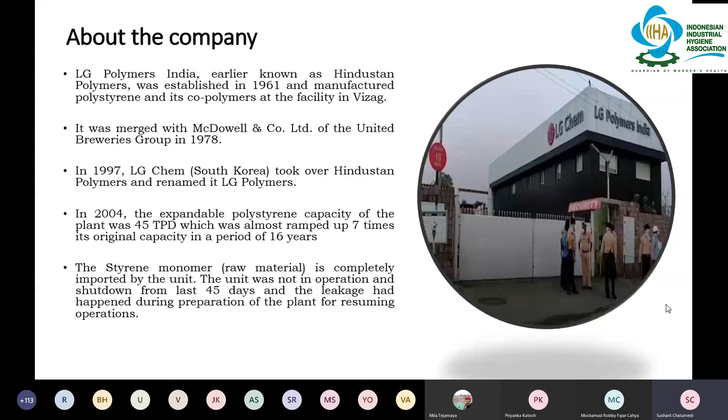Due to the current COVID pandemic, a lot of plants were facing manpower availability constraints, and also government had asked them to cut short operations. LG Chemicals was one amongst such plants, and they had shut down their operations on 24th March. And after almost 45 days, on 3rd or 4th May, they got a clearance from government to restart or sort of prepare for restarting their operations.

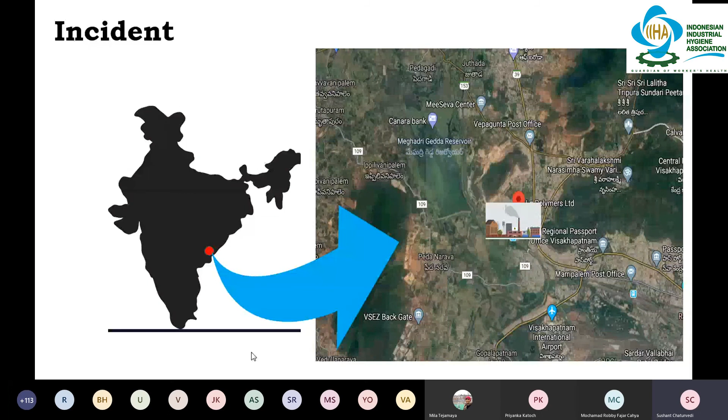Just to give you a brief idea about the neighborhood around the plant. On the north side of the plant, there was a vacant land. On the south side, there is a railway track. On the west side of the boundary, where most of the impact and damage has been recorded, there were residential plots. And on the east side of the plant, there is a river at 2-kilometer distance. This entire plant is spread over an area of some 213 acres, and it has got multiple tanks with huge storage capacities for styrene monomer.

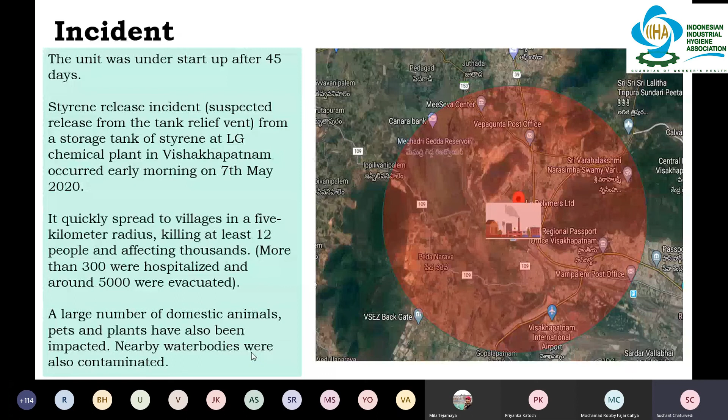So this is to give you an idea: the 5-kilometer impact area, which was identified by the municipal corporation and later on by the government agencies, was predominantly the impact footprint. This graph shown to you is a graph generated in a dispersion modeling software called PHAST version 8.2.

As a process safety engineer, I was quite intrigued about what could have gone wrong and what was the actual impact, because styrene is basically not a very toxic or hazardous chemical from a toxicity point of view. Yes, flammability hazards are there, but still there were some 12 fatalities. So I was really concerned about whether such fatalities should have happened or whether they could have been avoided.

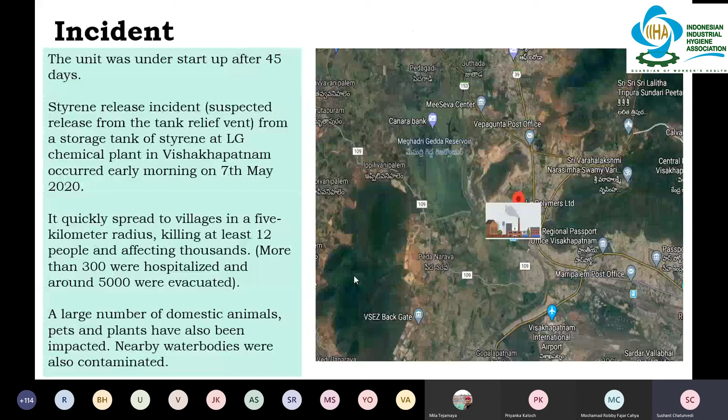Following is the sequence of events on the fateful day. In the early hours of May 7, 2020, at about 3 a.m., the storage tank developed a leak of styrene vapors from the top of the tank, which started spreading beyond the factory boundary towards the west side. Like I mentioned earlier, the wind was around 1.1 meters per second, going from east to west, so the west side saw the spread of styrene vapors.

The incident is tragic, of course, no doubt about that. But had the tank temperature shot up beyond 154, the incident would have been much worse, because that's the boiling point of styrene. As per the interim report published by the government agencies, some 800 tons of styrene escaped in the incident. At the time of the incident, they had an inventory of around 1800 something.

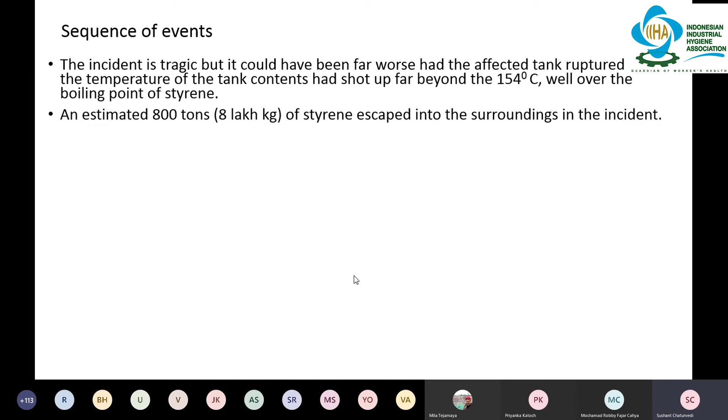The following are the noteworthy points. So what contributed to the incident aggravating to such an extent is, it surfaced in the interim report that the working crew was not able to access the PPEs, especially the respiratory protective device of SCBA, in a timely manner. The emergency response preparedness of the site was not up to the mark.

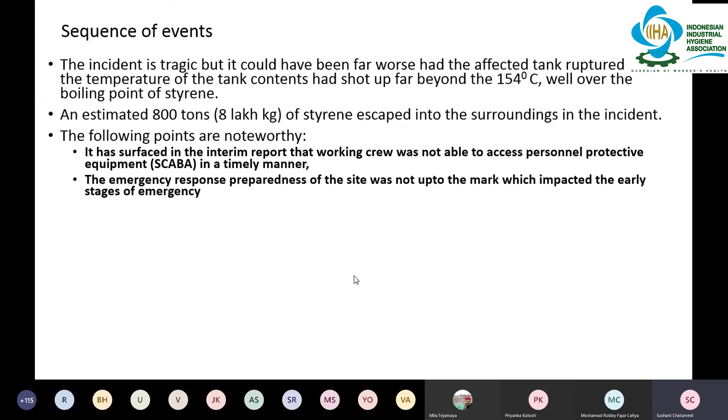This is very important. So already they were operating with a very skeletal operating crew, and even the crew which was present was not having the right mindset or the preparedness of emergency handling. So in the early stages of emergency, they could have controlled it, but they went into a state of panic, and because of a lot of reasons, they were not able to manage the emergency in a proper way.

And it was also identified that the public siren system available in the plant could not be activated, since it was a manual siren. It required someone to go and press the button to start the siren. And that area had been rendered inaccessible because it was engulfed in the vapor cloud of styrene. So this in turn hampered the alerting people process, and thus the extent of impact increased.

The root cause analysis, as per the report, shows that the problems probably began in April 2020. So, like I said, they had shut off their operations and they were still handling and storing the inventory of styrene since then. I'll cover this point in subsequent slides, but there are certain things to be ensured when you are handling and storing styrene, which probably they overlooked, and this incident started probably in April 2020.

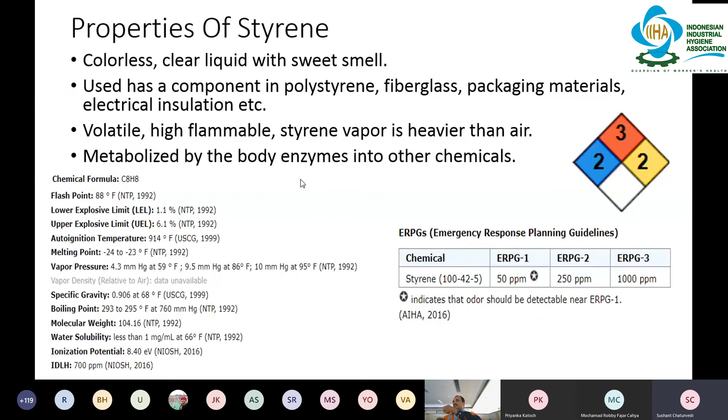To give you a brief idea about the properties of styrene, it's a colorless liquid with a sweet smell. It is used extensively for production of polymers. The main ERPG values are 50 ppm and 1000 ppm. It is a flammable chemical. And the biggest problem with styrene is it has...

Sushant. Sorry, Sushant, I guess there's some request. Just be a bit slower. Oh, okay. Thanks. In the back of my mind, I was thinking there's a paucity of time. No, take your time, just so that people can understand and see your slides properly. Yeah, sorry, thanks. I'll keep that in mind.

So styrene has a typical characteristic of polymerizing, and it also has a characteristic of polymerizing with its own monomer. Styrene basically has a free radical mechanism. So imagine a surface full of styrene, with a lot of monomers of styrene inside it, and it is always emitting styrene. The free radical comes out, and it is in a very excited state. So it requires to bond with someone to reduce its excitement. If it finds another styrene monomer, it combines with it and still stays in an excited state.

However, if there is some inhibitor chemical present like tertiary butyl catechol, it will combine with TBC and then the chain reaction stops. So styrene is a reactive monomer, and the polymerization generally takes place by a free radical reaction, which is initiated either thermally or catalytically. This is most important. For the styrene reaction to start, some energy is required, either thermal or catalytic energy, what we call the activation energy.

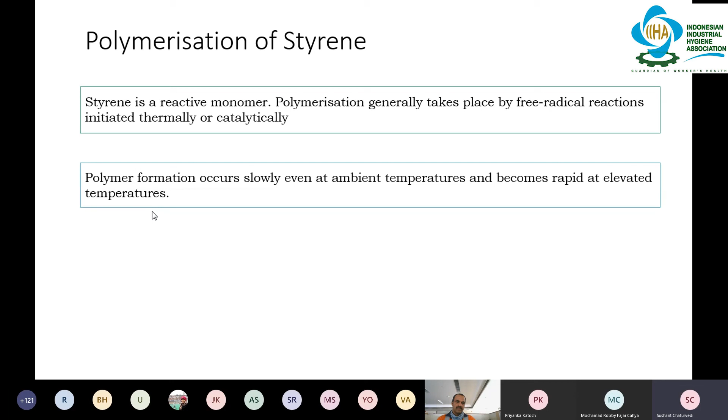The polymer formation is initially very slow when the temperatures are low. So at ambient temperatures, the reaction will not be very fast and the temperatures will not shoot up rapidly. But as the reaction proceeds with the evolution of heat, the temperatures start shooting up exponentially. To avoid this, the globally accepted practice is that the polymerization reaction is retarded or inhibited by phenolic inhibitors, and the most commonly used inhibitor is tertiary butyl catechol. The polymerization reaction is exothermic, as mentioned earlier, and it can become violent beyond a certain temperature.

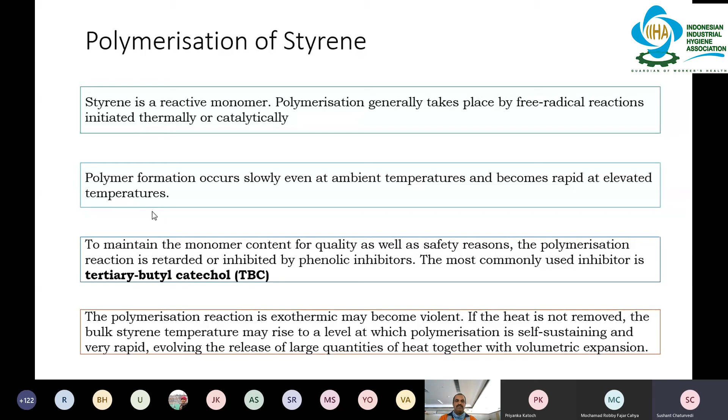If the heat is not removed in a timely way, the heat accumulation can go to an extent where polymerization can be self-sustaining. So it may not require any further temperature excursion, and it can become self-sustaining, and it may not require any other driving force for it to continue. And in the process, it may also release a large quantity of heat together with volumetric expansion, which was what was evident in this incident.

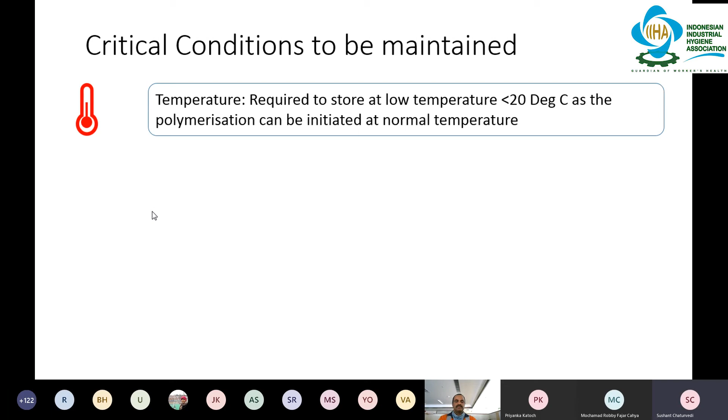So what are the critical conditions to make sure that this doesn't happen? So there are basically three important criteria. First critical condition is temperature. So styrene monomer storage tank should always be maintained at a temperature below 20 degrees centigrade, since that is the onset temperature, and once temperatures are not maintained below 20 degrees, the reactions can start.

TBC dosing. So tertiary butyl catechol, the inhibitor that is being used for styrene reaction inhibition, its level has to be maintained at around 10 to 15 ppm, and this is most important. So TBC level in the tank should be maintained 10 to 15 ppm, and it has to be monitored regularly, because if you start losing the TBC concentration, or if due to some reason the TBC concentrations are depleting, there are chances that the polymerization reaction can start.

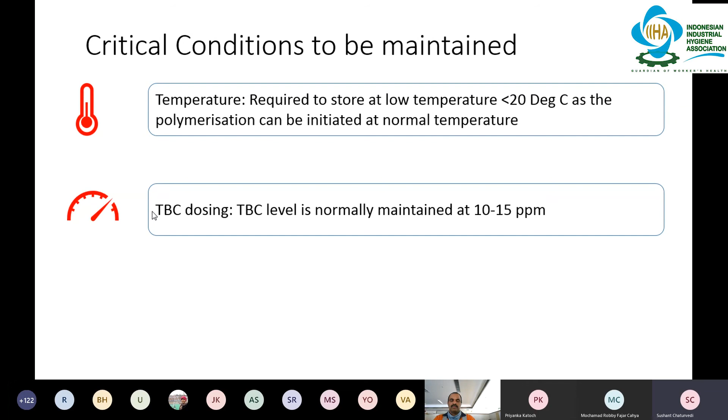And most important, another part is TBC cannot combine with styrene if there is no oxygen. So a typical characteristic of a flammable compound tank like styrene is it will have nitrogen padding. So if there is a nitrogen padding, the problem is that the TBC will not be able to combine with styrene monomer, since it requires oxygen as well for combining with styrene.

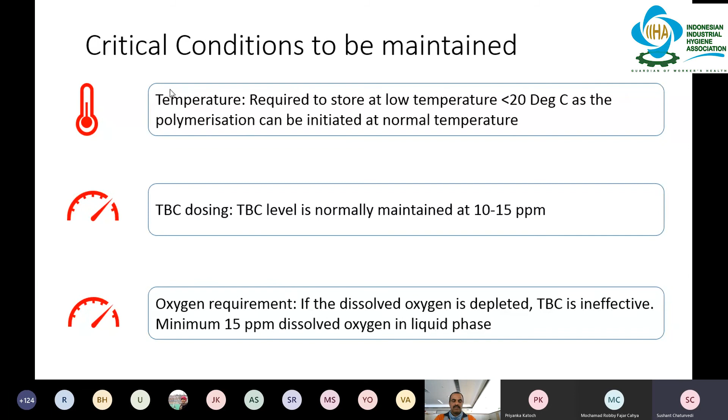So what industry people do is they also maintain an oxygen, or they sort of inject oxygen in the environment of styrene, where the oxygen concentration should be minimum 15 ppm of dissolved oxygen in liquid phase. And this is the precursor for TBC to be effective and available for inhibiting the styrene polymerization reaction.

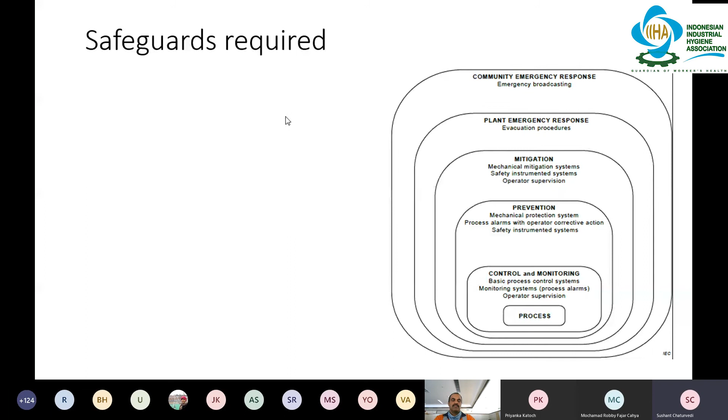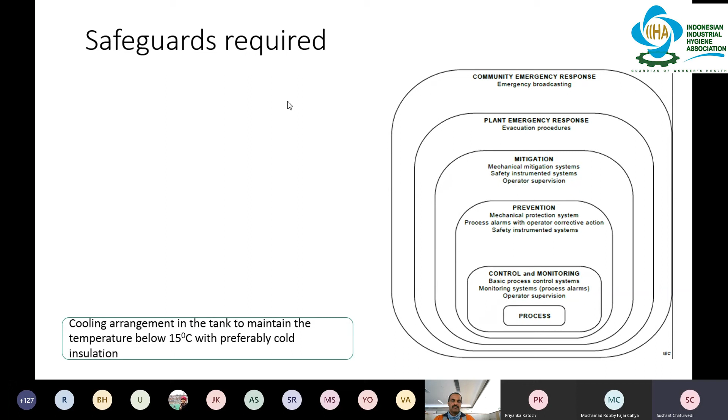So this is the general chronology of safeguards. You first have control and monitoring system, then preventive safeguards, mitigation safeguards. Finally, you have your emergency response systems for plant and for outside. So for control systems, in this case, the tank should have a chilling mechanism or a refrigeration mechanism where temperatures are maintained below 15 degrees, and also it should have an insulation for cold systems.

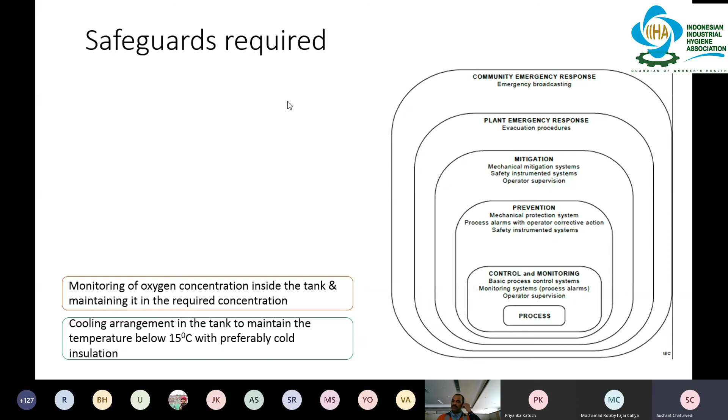The oxygen concentration inside the tank should be monitored and maintained in the required concentration, which, as I mentioned earlier, should be minimum 15 ppm for the styrene to combine with TBC. The TBC level should also be monitored because TBC along with oxygen should be available in minimum 15 ppm concentration. So TBC monitoring is also critical.

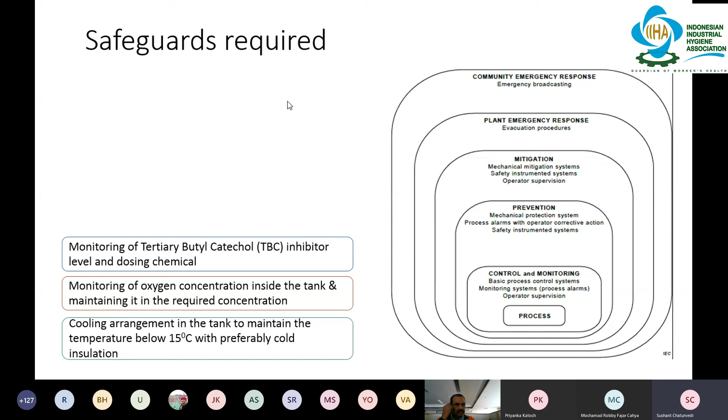In case you are not able to monitor or maintain these concentrations, the first signal should be the temperature rise, and that should be wired to the panel operator. So there should be monitoring of tank temperature at 3 locations: the top of the tank, middle of the tank, and bottom of the tank. And once you have a temperature rise of the bulk mass of styrene inside the tank, there should be a mechanism which alerts the operator that tank temperatures are rising.

There should be another pressure alarm. At times, instruments can go haywire. So in case your temperature alarm doesn't show the excursion, you should also have a pressure alarm to alert the operator. The emergency relief devices should be there. Here in this case, there were rupture discs, there were relief valves. So all tanks should have some emergency relief devices to take care of the overpressure.

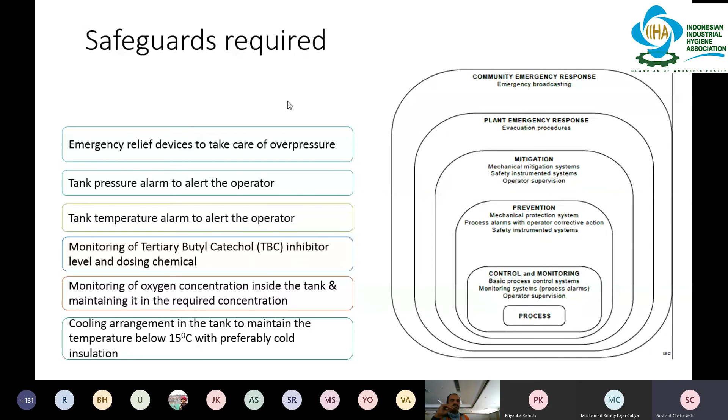And this is very important because in case of reactive chemicals, the relief devices have to be sized using specific studies. So there is a study called vent sizing package, which is used for understanding what should be the relief device size. Those are very specialized studies which need to be done when you are engineering the emergency relief devices for chemicals like styrene. And finally, you need to have very sturdy and up-to-date emergency response plans, because everything can go wrong, and finally you have to have yourself prepared for the emergency.

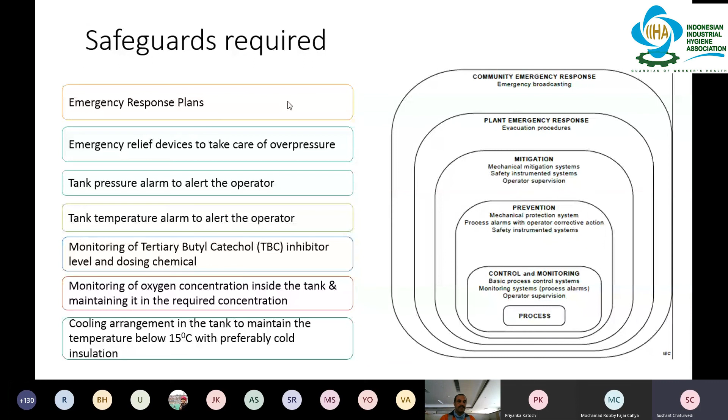There was an interview which was telecast on a local channel in Andhra Pradesh. Basically, this plant is located in Andhra, and Mr. Mohan Rao, who is the director of operations and currently under legal investigation, was interviewed by local TV channels, and it was in the local language. So I got it translated with the help of my friend.

What he mentioned prima facie was, according to him, the reason for the styrene leak was a runaway reaction, and this caused overpressure in the tank, blowing the roof. However, later on it was understood that the roof had not blown off. Yes, there has been some leak in the tank roof, but there was no blowing off of the roof and eventual release of the gas. So from the above statement, it can be inferred that the temperature shot up beyond their control range, and they were not able to stop the leak as the polymer had a runaway reaction, and it cannot be controlled.

In fact, the interim report clearly states that they had a practice of switching off the refrigeration system every night, because they believed the ambient temperatures were low enough to keep the styrene monomer below the required temperature of 15 degrees. And also they had depleted stocks of TBC. So what they thought was, because they already had a certain amount of TBC in the tank, maybe they won't be requiring TBC for a long period of time. And also it is believed that they might not have monitored the levels properly.

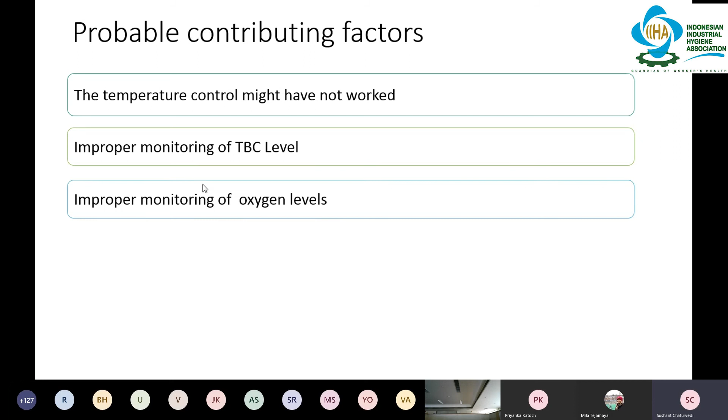So what are the probable contributing factors? These are based on the reports. The temperature control might not have worked. Improper monitoring of TBC levels. These are basically my inferences from what I read on the internet. So maybe they were not maintaining the temperature control properly, which has come out in the report. Maybe they were not monitoring the TBC level. Since they didn't have TBC quantities, the monitoring became very critical for the existing concentration. So maybe they were not monitoring properly. Also, the oxygen levels were not being watched properly.

Since they had shut off the plant for almost 45 days and they had very less staff to operate with, they should have conducted an effective pre-startup safety review so that it could have helped them in making sure and checking whether they have the right systems and right people to kickstart the plant back again.

And in general, it was observed that the people who were there probably did not have the required level of awareness about the hazards of styrene. What are the reactivity mechanisms? What are the runaway characteristics? And how to handle the emergency and be prepared for the emergency. So in total, it could be said that the awareness about the hazards of styrene was not at the required level.

And finally, as is evident from the report and from the extent of damage, the emergency response was not effective. So emergency response and control planning should be proactive, and you should be prepared with all the equipment and devices beforehand. And you should not run here and there in case of emergency. You should know exactly what needs to be done by whom and up to what extent.

So with that, I would like to hand over to Mr. Shrenik for his presentation. So Shrenik, over to you. Thank you very much, Sushant. If you can unshare your screen. Yeah, I've stopped sharing. Thank you very much. Excellent session, Sushant. Really appreciate the way you talked about some of the background about the company, what led to the incident, and then what were some of the things that were missing. So really very nice information was shared by you. Really appreciate it. If you can mute your line, it will help me. Okay.

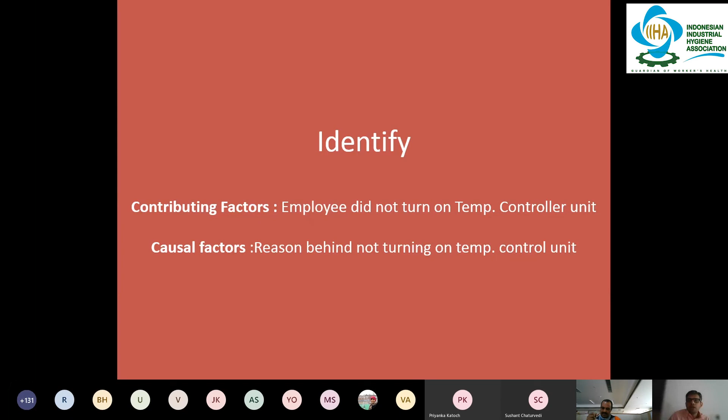So what we have done is we have used the 5 why analysis and cause and effect analysis. We kept asking questions based on the information that is available, and then a team of IIHA sat together to identify what were some of the root causes that we could identify related to the causal factor analysis. So the main incident was a gas release.

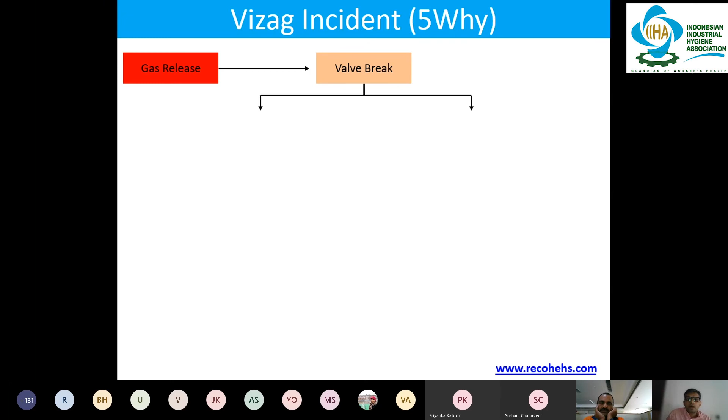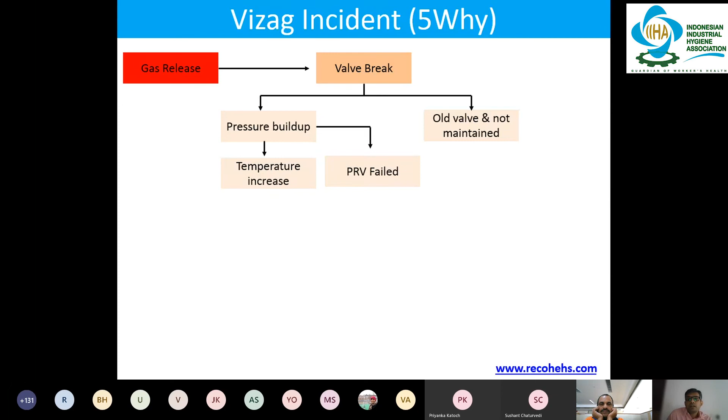Now, we tried to identify why that particular gas release happened. So one of the things that the IIHA team came up with was there might be a probability that the valve broke. Now, based on the valve breaking mechanism, we tried to identify how the valve would break. So there can be a pressure buildup, or the particular valve was very old and not maintained. Now, why was there a pressure buildup? Because there was a temperature increase, or the pressure relief valve failed.

So we tried to go deeper and identify further why there was a temperature increase. There was a temperature increase because the temperature controller failed, because the employee did not turn on the temperature control unit, because we failed to turn on the temperature unit during the startup. So these were a few of the things which would have led to a temperature increase. And also the chemical reaction inside, as Sushant shared, would also have contributed to the temperature increase and then the pressure buildup. Now, we tried to find out why the temperature control unit failed.

So we dug up some information: the temperature log we checked was okay. The particular temperature controller was calibrated, so lab tests and the calibration records were available. This says that these are not the reasons which resulted in the temperature control failure. Then we moved to the next cause, whether the temperature control unit was turned off.

We found out that procedures for operating this particular storage tank were not available. So the procedure doesn't specify that the temperature unit needs to be turned on when we store any particular chemical. Now, the employee who was using this particular storage tank was not aware that he needed to turn on the temperature unit controller, and there was no pre-startup process safety management done for this particular activity.

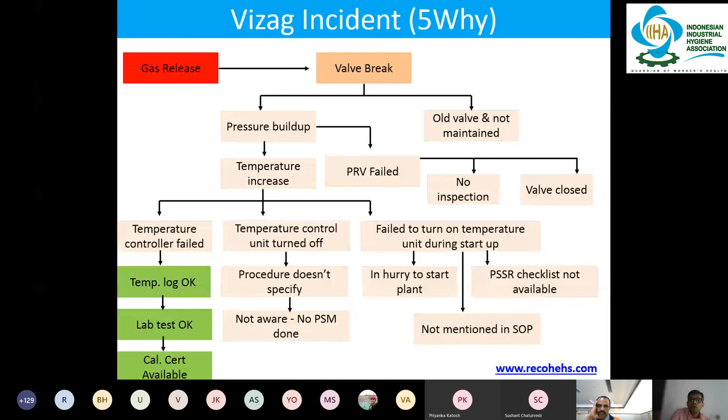And then when the pressure relief valve failed, probably there were no inspections, or that pressure relief valve would have been closed. And that is why that pressure buildup happened. And then because of it, the valve broke. So that was about the 5 why analysis that we used.

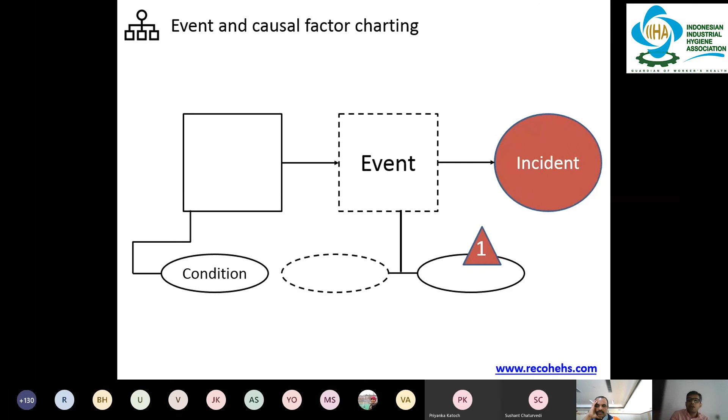Sushant showed us all the incidents before the gas release, but now we have used this causal factor analysis to identify how the response was once the gas release happened, and what are some of the things or conditions that were missing in that response. So we have covered both. First is before the incident, what are the causes and things that happened, by 5 Why analysis. And now with this causal factor analysis, we are going to demonstrate what are some of the conditions that were not met after the gas release happened.

So 11 people died and around thousands of people were affected. Now at 4 a.m. they notified the authority, and around the same time evacuation started. So when they started the evacuation, there were some conditions that had to be met, which means those control measures had to be there at that time to ensure that evacuation is proper, and then the casualties will not increase. So emergency equipment was not available when they started the evacuation, like self-contained breathing apparatus and all. The people around the industry and inside the industries were not aware, if a gas release happens, of the control measures we need to take, or how to keep ourselves safe from those incidents.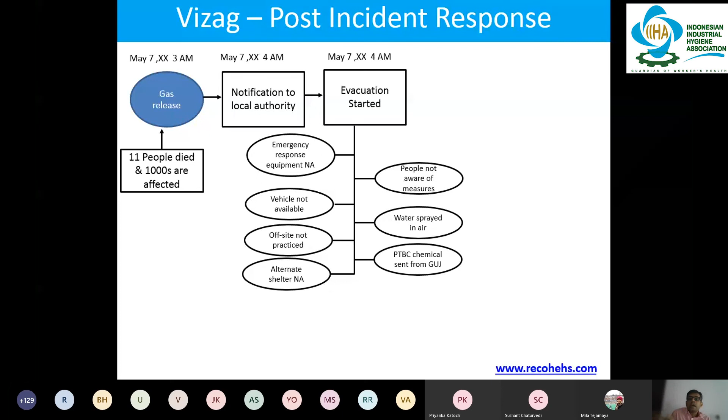Now, emergency vehicles were not available. There was a huge evacuation required and the number of vehicles was very short. So that response time also led to more casualties in nearby premises. Now, they started spraying water in the air, and the offsite plan was not available and it was not practiced properly. Now, the PTBC chemical was sent from another state. So if their emergency response was proper, they should have kept that chemical at the site, so that in case some emergency happens, it could be used to reduce the effect of the styrene gas release. If all these things had been in place, probably this severity and this many casualties would not have happened.

Now, around 5 a.m., they started to admit people to the hospital. Now, what happened at the hospital? The staff was not aware of the treatments or the antidote that needed to be given to the affected people. So that was not in place. There were not enough beds available for the number of casualties. There were a thousand people affected and they did not have that much capacity at the hospital. And they wanted to give them oxygen, but they did not have enough oxygen bottles at that location. And around 11 a.m., they brought the situation under control.

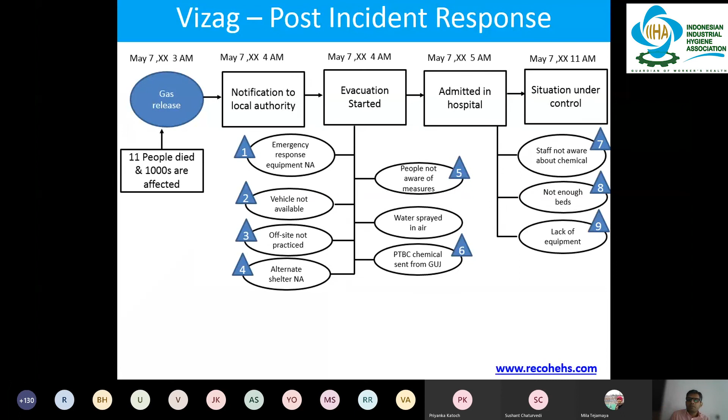So what I mean to say is there were 9 conditions that were not met once the gas release happened. So in recommending controls, we have looked at these 9 conditions post-incident, and all the 5 Why analysis causal factors that we identified. If these had been met, probably the thousands of people affected would have been brought down below 500, and even the casualties. So while identifying the incident control measures, we looked at the work environment and equipment. We looked at the procedure followed by the company, the people interaction during that time, people and procedure interactions, and the environmental interface.

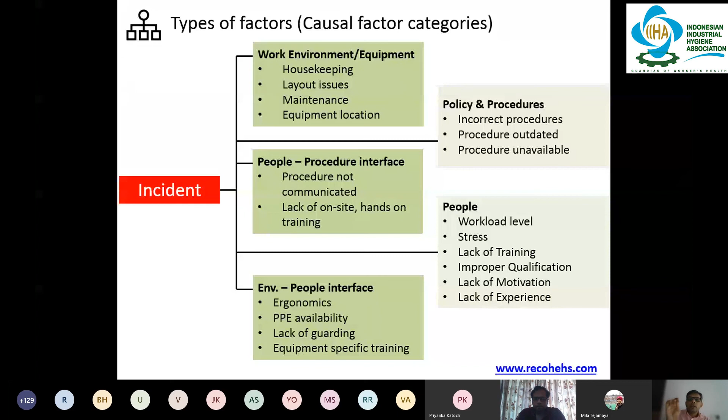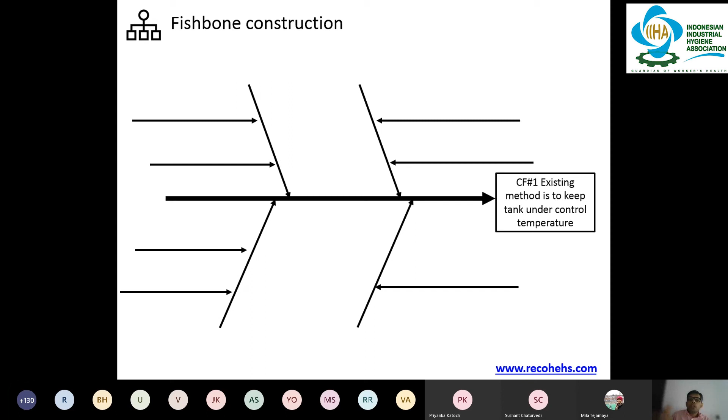So these were the conditions and the factors that we looked at while identifying the particular corrective actions for this Vizag incident. So what we did is for all those 9 causal factors that we found, and also from the 5 Why analysis, we developed a kind of fishbone for each of the causal factors. So we have 9 plus 6, total 15 causal factors. So we developed a fishbone for each of those causal factors and tried to put it in a particular fishbone analysis.

So I'm going to display only one causal factor for your purpose, on how we have identified the particular corrective actions. And then at a later stage, I will summarize a few of the corrective actions. So training to the people who are working with the particular equipment was conducted 5 years before. It was not conducted recently. The training program was not updated using the particular methods that are required for people to know.

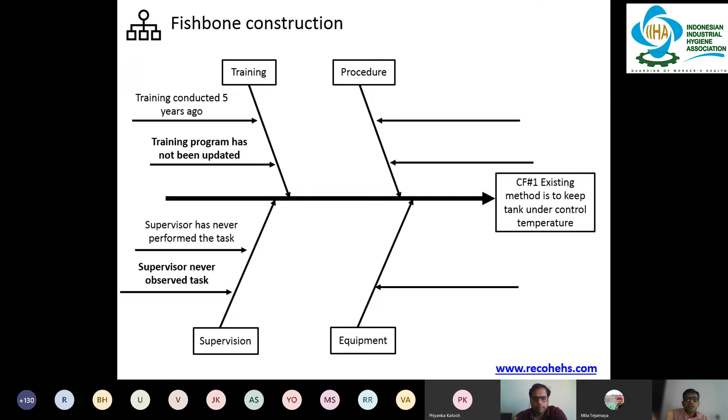If we talk about the supervision, the supervisor never performed this particular task, or he has never seen this particular task. So probably he did not have an idea on how to restart these particular operations and what are some of the storage practices. Now, the procedures, we believe, were unclear for people to follow, and they were not written step by step. If they had been written step by step, probably this would not have happened, and employees working with that would have at least followed those procedures.

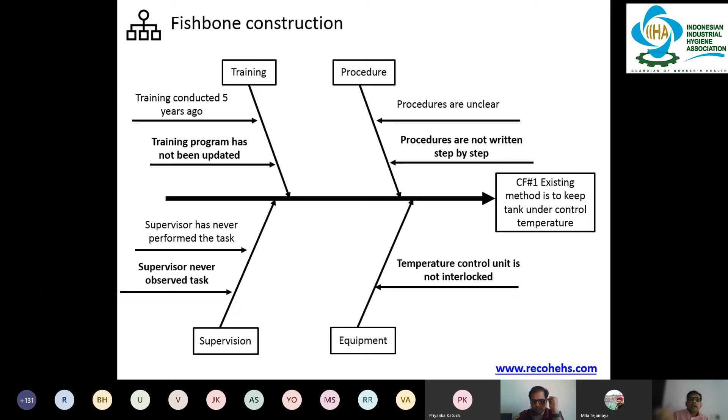And then when we looked at the equipment, the temperature control unit is not interlocked. So if temperature is increased above 20 degrees Celsius, it may have an interlock. So you will not have a storage. You will not have any addition of styrene inside the tank. And also you will have a cooling system getting started. So those kinds of interlocks were not in place when the equipment was there.

And this is my last slide on some of the corrective actions that we believe can help in terms of not repeating such an incident in future. So the temperature control unit was turned off. If there is an auto cutoff temperature controller, then this would not have happened. Communication, the process safety management, temperature rise alarm. If there is a temperature rise, there will be an alarm. Temperature interlock with pressure relief valve. So if temperature goes above 20 degrees Celsius, the particular pressure relief valve will open automatically.

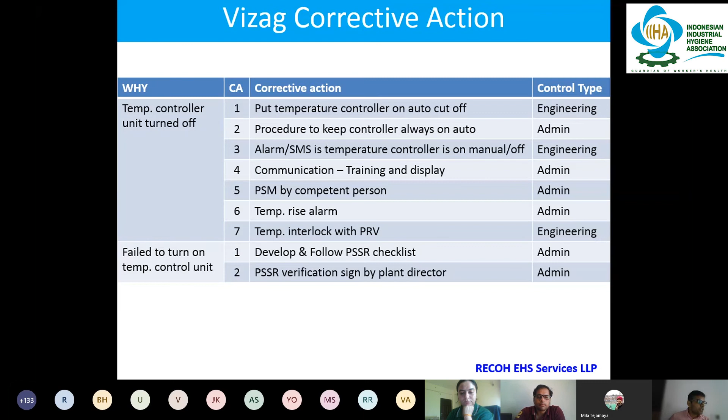Another factor on which we have identified the control measure is failure to turn on the temperature control unit. So develop and conduct a proper pre-startup safety review, and then that verification needs to be done by the plant director at the particular facility. So with this, I will say this is our analysis of the CIHA team using both 5 Why analysis and fishbone to derive the corrective actions. And we tried to cover both pre-incident, what could have led to this particular gas release, and then after the gas release happened, how was the response and where we can improve further to keep the number of casualties at a lower level.

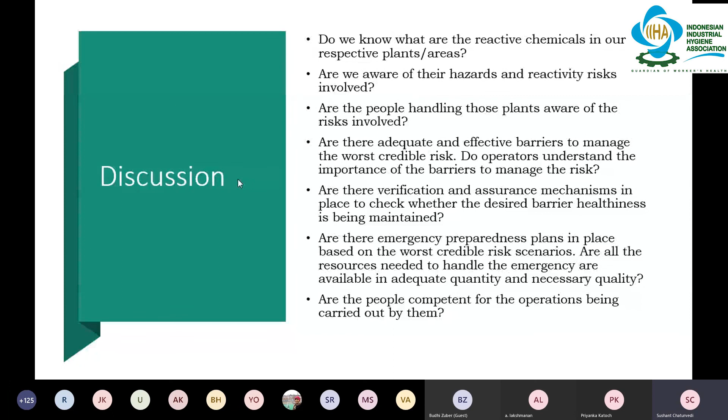And last but not the least, are there emergency procedures or emergency preparedness plans in place based on the worst credible risk scenarios? Are all the resources needed to handle the emergency available in adequate quantity and necessary quality? And are the people who are doing the activities in the plant competent for carrying them out?

Here I would like to bring in some of the technical aspects about reactive chemicals and how they are overlooked or not understood by people at large. A few important terms we should understand or try to find out about when we're handling or dealing with reactive chemicals are self-accelerating decomposition temperature, temperature of no return, the maximum reaction temperature and pressure, incompatibility or compatibility studies, or what we call the chemical interaction matrix, and induction time. So I'll quickly go through them one by one and try to explain what they mean and what is the intent of knowing them.

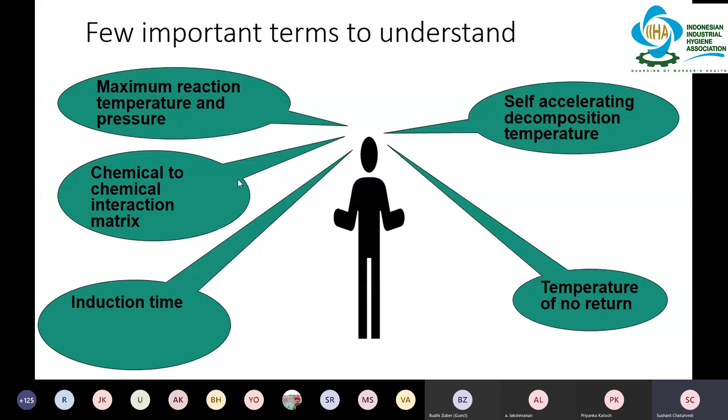So first is self-accelerating decomposition temperature. It is the lowest ambient temperature at which runaway decomposition is observed within 7 days. There is a specific test which is carried out wherein a material is stored in a container and the temperature rise is observed over a period. The information which is gathered helps in identifying the temperatures and the conditions to be maintained when you're transporting a chemical from one area to another, or when you're storing the chemicals. So it is basically useful in storing and transportation of styrene and in general the reactive chemicals.

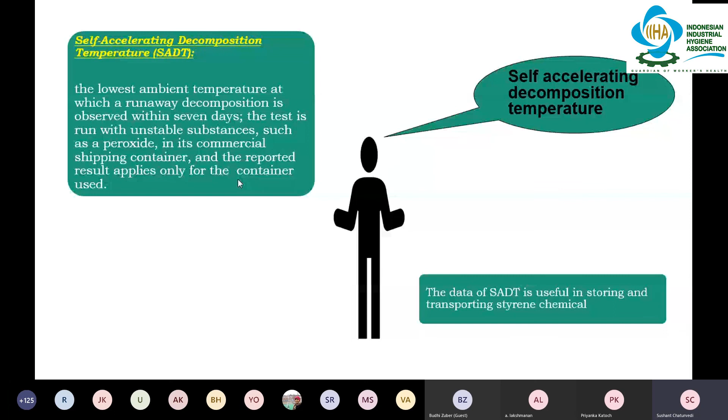The next term to understand is temperature of no return. Temperature of no return is a key parameter for understanding and managing the reactivity hazard, especially for processing reactive chemicals and where there are chances of exothermicity in the batch reaction. And the key is that you maintain the normal operating temperature below the temperature at which the reaction heat gain exceeds the heat loss to the surroundings.

So basically, what is runaway? Runaway is when the energy released is much larger than the amount of energy absorbed or dissipated by the system. The runaway happens and the energy starts to accumulate. So if you maintain the temperature below that point of no return, you can have control over the reaction. But once the temperature of no return is surpassed, even with your mitigative actions, it becomes very difficult to bring it back.

So to have more clarity, this is the graph. If you look at the red line and the green line, the green line is basically the heat being lost to the surroundings. So there is a point when the red line rises above the green line. The red line is basically the heat gain from the reaction, and it is based on the kinetic model.

So when heat is getting evolved from the system, there is a point at which, if you are not removing the heat or not managing the heat properly, it can go beyond that point, and then it is difficult to bring it back into the control regime. That point is known as the temperature of no return. So the point where the green line and red line intersect, and the red one goes above the green line, is known as the temperature of no return.

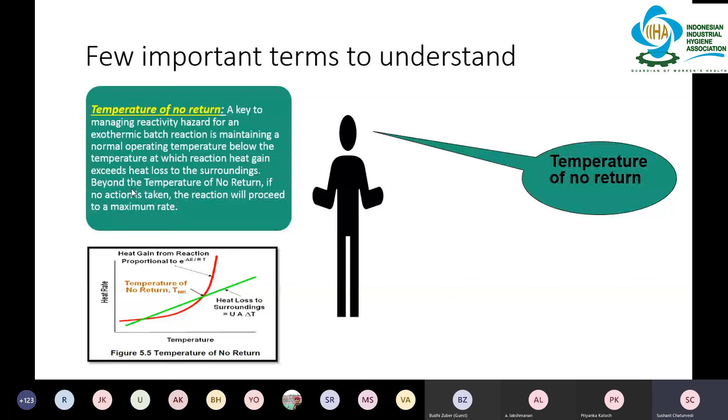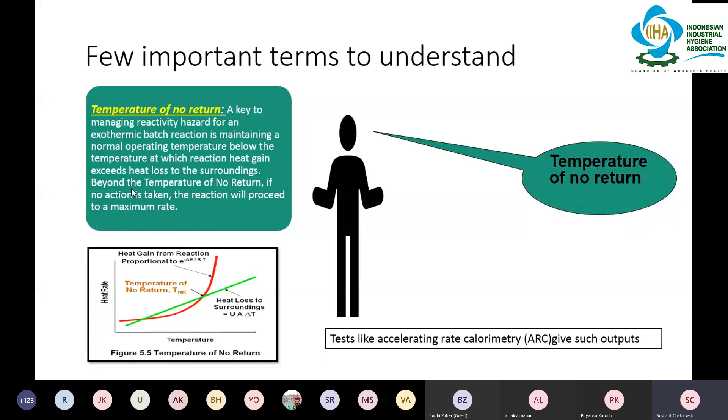Another important term is chemical to chemical interaction matrix. Basically every chemical has its own stability characteristic when it comes in contact with another chemical. Chemical interaction matrices are nothing but compatibility charts which are commonly used to summarize the potential hazards of mixing one chemical with another chemical. This information is useful if available beforehand in designing your operations and site layouts. And this is how a chemical interaction matrix looks.

There are some chemicals on the x-axis and some on the y-axis, and there are certain blocks which show green, red, and yellow. Green probably indicates it is okay if you mix those chemicals or they come in contact with each other. Red probably indicates complete incompatibility, and yellow shows some mechanisms which may not be acceptable, some undesirable reactions.

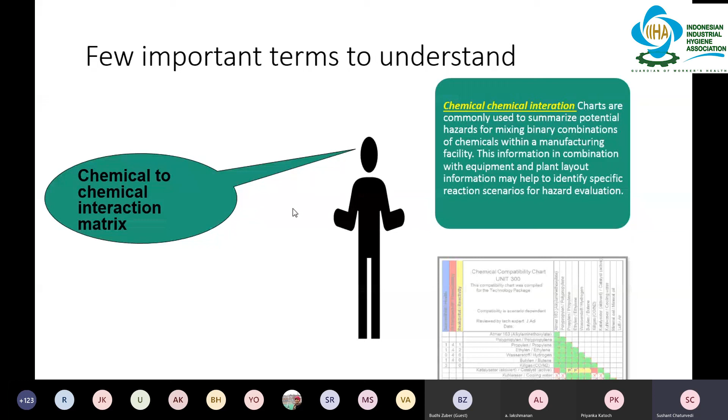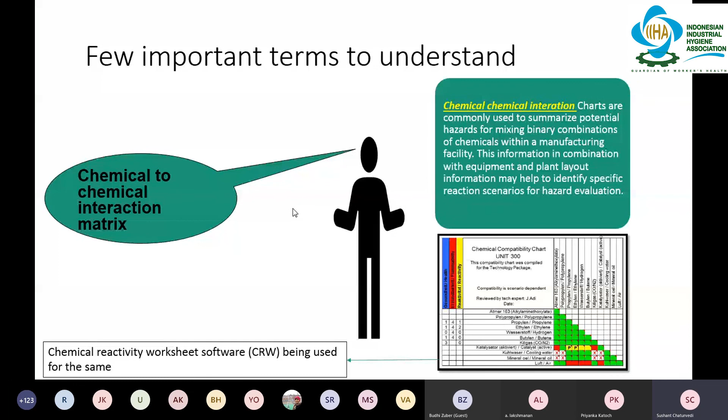For these types of studies in today's engineering world, there is software available, like CRW. CRW is software available from AIChE, and it is very extensively used by process safety engineers across the globe for understanding compatibility issues.

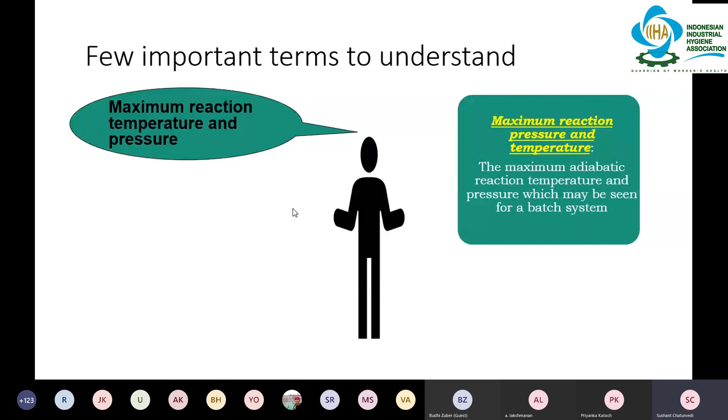Next is the maximum temperature and pressure of reaction. This is the maximum adiabatic reaction temperature and pressure which may be seen for a batch system. The intent of understanding this is that it helps you in designing and defining your relief system criteria. When you know the maximum temperature and pressure that you're going to encounter, you know for what the relief system should be designed.

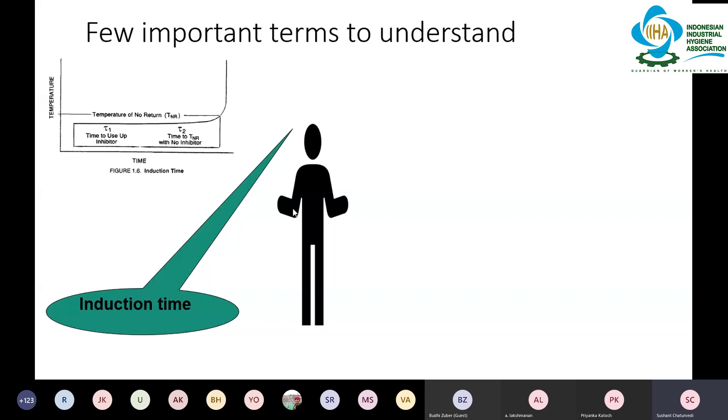Finally, there is a term called induction time. If you look at the graph shown on the top left, there is time elapsed before the material reaches the temperature of no return. In the absence of anything to prevent a reaction, a chemical reaction will begin when the components and any necessary energy of activation is present in the reaction system. Like I said, there is a free radical mechanism, and if there is a temperature or a catalytic component available, the reaction can start.

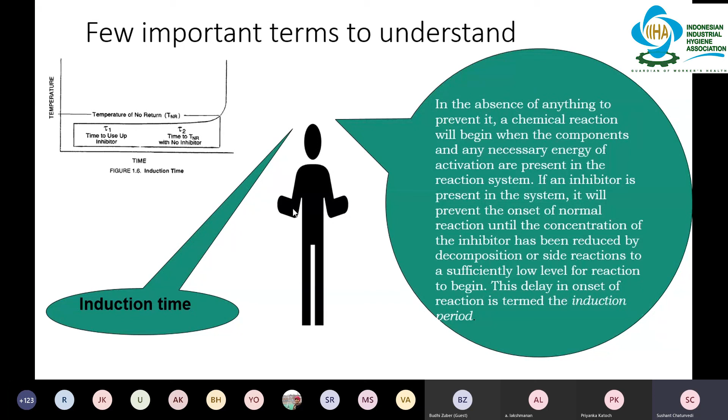This can be prevented by adding an inhibitor, which will prevent the onset of the reaction. This delay in the onset of reaction caused by the addition of an inhibitor, that time lapse, is known as the induction time. So these are a few important terms that I would like you to really understand, and try to identify whether you have these pieces of information in your workplace if you are dealing with reactive chemicals, and whether you have really tried to understand how you can utilize them.

Some of the references you can refer to are NFPA 49, though it is not available now. But if you get an older version, it's a very nice document. NFPA 49 was hazardous chemical data. There are 3-4 standards which have been merged into the Handbook of Fire Protection Engineering, and NFPA 49 is one of those standards. So it doesn't exist as a standalone standard now, but you can find an older version. There are certain books published by CCPS, that is, the Center for Chemical Process Safety, America.

Essential practices for managing chemical reactivity hazards, guideline for safe storage and handling of reactive material, guideline for chemical reactivity and process safety design. So these are very nice reference books that you can refer to. There is also Bretherick's handbook. Bretherick was a chemist who did a lot of work on reactive chemicals, and he has published a handbook of reactive chemicals and chemicals in general, which is very good reference material. And finally, we also have a nice book to start with, Chemical Process Safety by Daniel Crowl and Joseph Louvar, 3rd edition.

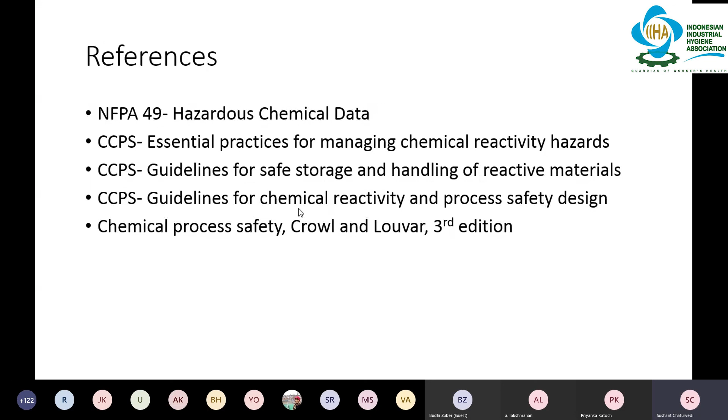That's it from my side, and I hope I was able to help you out with the information that can really help you understand the reactive chemicals in your area.

In fact, one thing I would like to add, Sushant, on this, you talked about the self-accelerating decomposition temperature. Since we are not aware of this particular property of a lot of chemicals around us, just wanted to highlight. Say, for example, if I take the example of milk powder itself, we use it everywhere. So if we store milk powder in a big silo, it can decompose.

Jitendra, your voice is not coming through properly. If you could come closer to the microphone. There is some disturbance from somewhere else.

Yeah. So what I was saying is that if milk powder is stored in a silo, it can start decomposing itself at 90 degrees only. Sugar is another example. So there are a lot of chemicals for which the general awareness is actually missing right now, because we have not seen too many incidents in the recent past. But these are the things that can make a lot of difference if we can start understanding the hazards of the chemical, as Sushant mentioned earlier, and taking adequate actions more towards prevention, and then looking at mitigation also. Thank you.